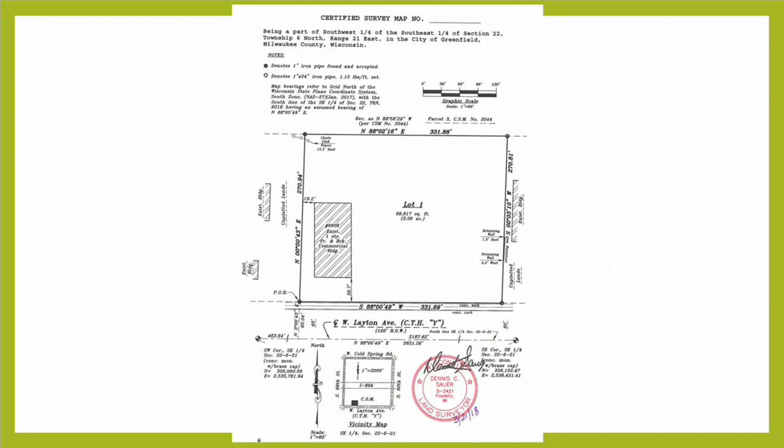Item 5 is a signage plan appeal for Jin's Sushi Seafood and Bar, the proposed business located at 7401 West Barnard Avenue, submitted by Paul Butler, Bauer Signs. There's a typo, that last zero is not supposed to be in there. Entertain a motion to approve. I'll make a motion to approve. Motion by Commissioner Carlson, second by Commissioner Kranz. All in favor? Aye. Aye. Opposed, motion carries.

Item 6 is a conceptual plan for The Lokal, a component of the 84 South development at the northwest corner of South 84th and West Layton Avenue, submitted by Scott Yauk, doing business at 84 South Restaurants, and Audrey Gill from Rinka.

Thank you, Mr. Mayor. This item was before the Plan Commission, also as a conceptual plan in August. At that time, the proposal included 3 different buildings to the very southeast corner of the 84 South development, but the northwest corner of 84th and Layton. Since then, the developer has gone back and reconsidered the options and is moving forward with a concept that includes 2 buildings. So with that, I'm going to turn the presentation over to Rinka. I'll just pull up the slides, and Rinka will provide the presentation before the Plan Commission this evening.

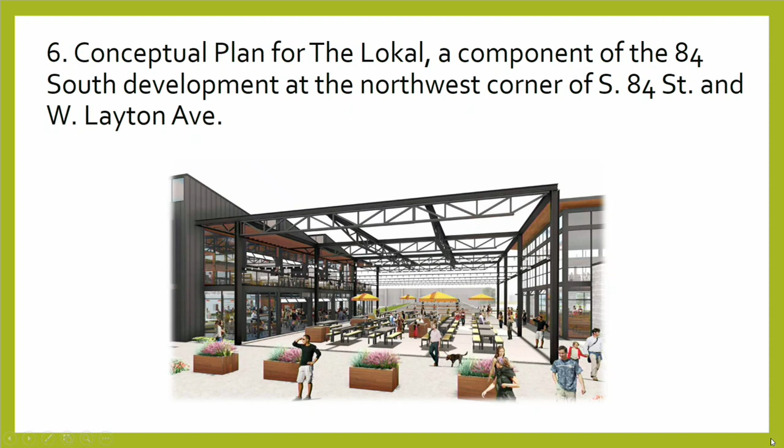Just before you start, one quick thing - this is, I think, the 4th or 5th conceptual plan. This is probably the most talked about corner in the city, and we're just trying to make sure that it's done right. So, all right.

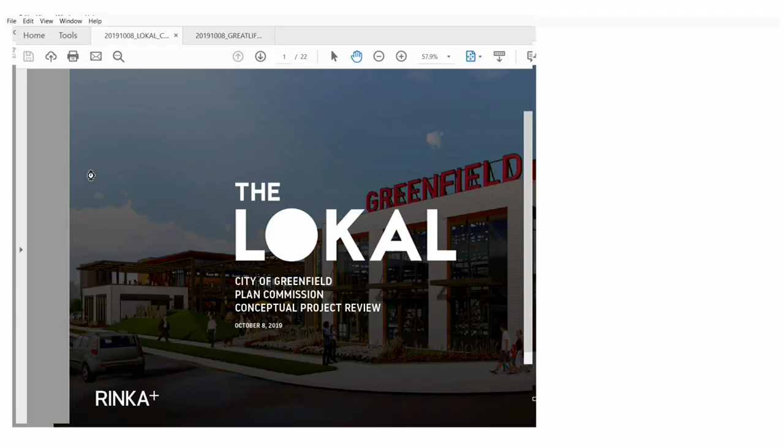Thank you for having me. I'm here in front of you to present an update as a conceptual submittal. The idea here is that we heard the feedback last time, and working with our client and developer of this project, as well as wrapping up the final pieces of this overall development - we're also the architect for 84 South - we wanted to make sure that we're continuously working with the feedback that we've received, as well as some of the council members.

The idea here is to create a very vibrant and destinational location for the city, for both residents and future visitors. We'd like to provide you with an update today, as well as an animation and some imagery that will walk you through the changes made since the last presentation.

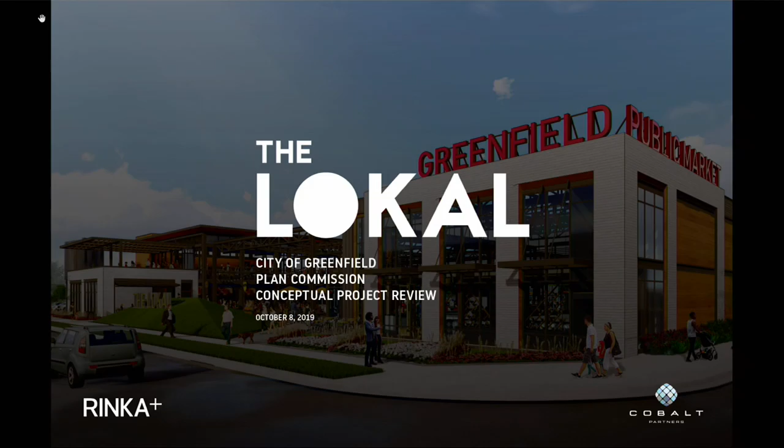Across from that is the C1 building, a public market space. It's envisioned as two levels, with space upstairs for seating and some small event space. The first floor is a very open public market with a series of 8 to 10 vendors, with great activity and seating areas for the community to gather. That building also spills open onto the Bier Garden space in the center, and both buildings work in concert around this central space.

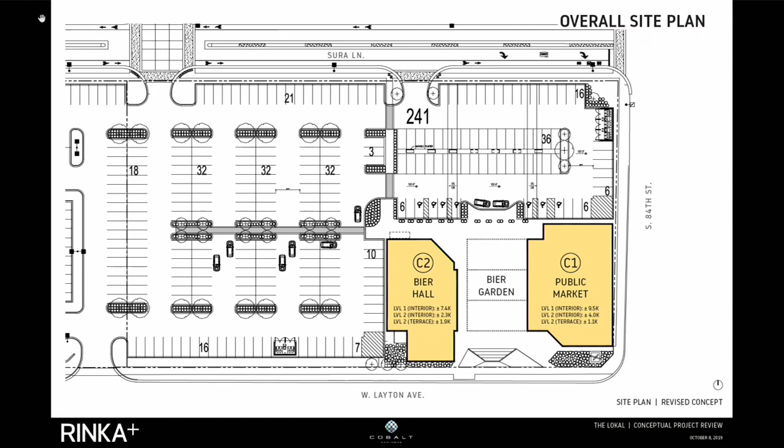In the bottom right corner of the map, there's an area of landscaping addressing the corner condition at 84th and Layton. We're also showing a small seating area, which I'll talk about more. The parking to the north and west accommodates a good ratio to make sure there's plenty of parking for patrons visiting the site.

I'll zoom in here so you can see a bit more detail. You can see the tiered seating at the south between the two buildings—an area doing dual purpose. It creates a variety of seating options for patrons, and it also creates a sound buffer and visual buffer to Layton Avenue, because when you're sitting outside enjoying dinner or a beer, you don't want it to feel like you're sitting on a highly trafficked street.

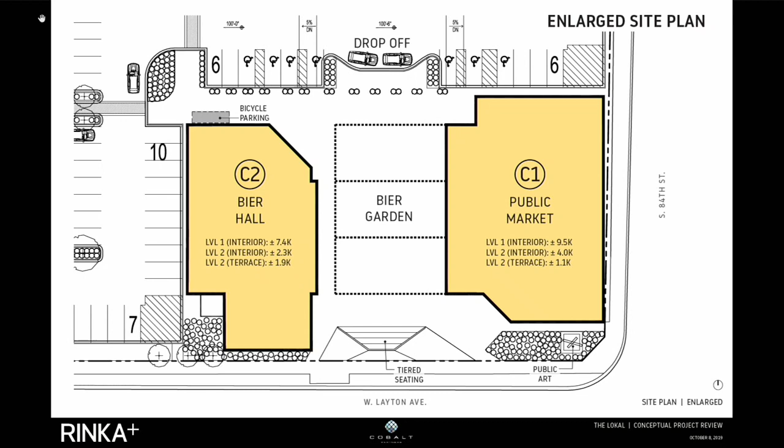So we're making some of those moves on the site, as well as ensuring a drop-off condition to get patrons safely in and out of the area. We've got bicycle parking accommodated, and trash and refuse located appropriately to separate those uses and make sure people can use the space in a great manner.

There are ways to get around this space pretty easily—seating areas and seating pockets around it, great ways to get to the parking safely, protected sidewalks, easy access, and great areas for people both on foot and on bicycles to get onto the site safely.

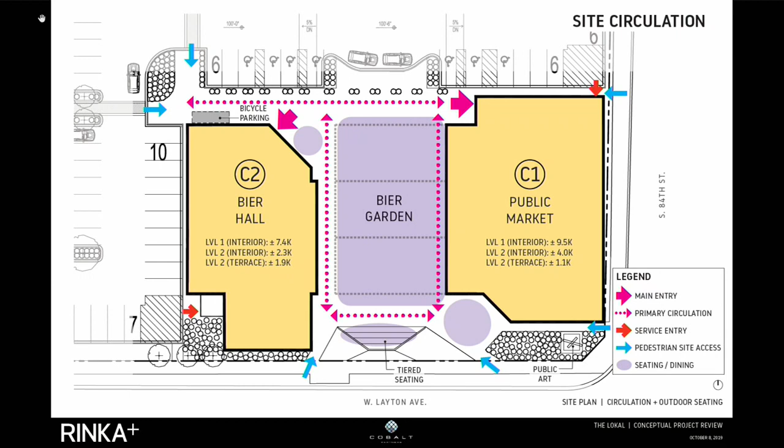And to enjoy the available amenities here. Moving forward, these aren't necessarily what we'll be doing, but as we designed this and other projects, we had to think about the flexible future nature of this site. So we looked at what we could actually fit, and the next few slides show a couple different activities that could fit within the central Bier Garden area.

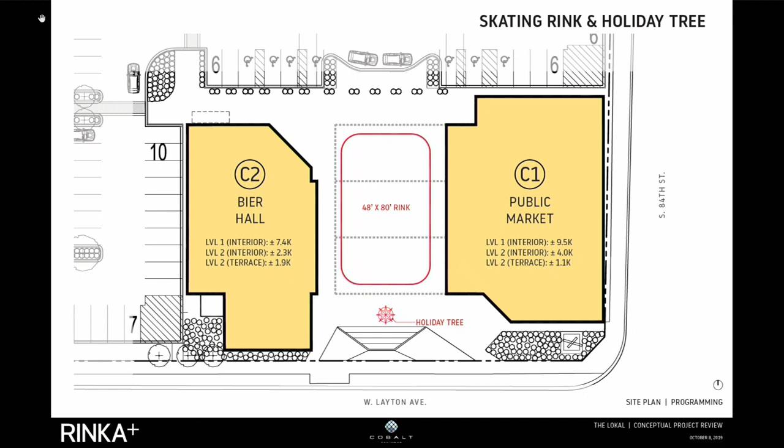We're showing a temporary ice rink that could be there for some of the winter months, as well as a space for a holiday tree, if that was something the developer, working with the city, wanted to propose. There are also 15 by 50 half sheets for curling.

This has become a popular event, a great way to get people out in those colder months when we know that's really the activation time. The space is envisioned to be used year-round as much as possible, weather permitting, but it allows us to be flexible with programming so we can have activities in colder months, bring in temporary heat, and extend the seasons a bit more, knowing our environment tends to get cold for quite a bit of the year.

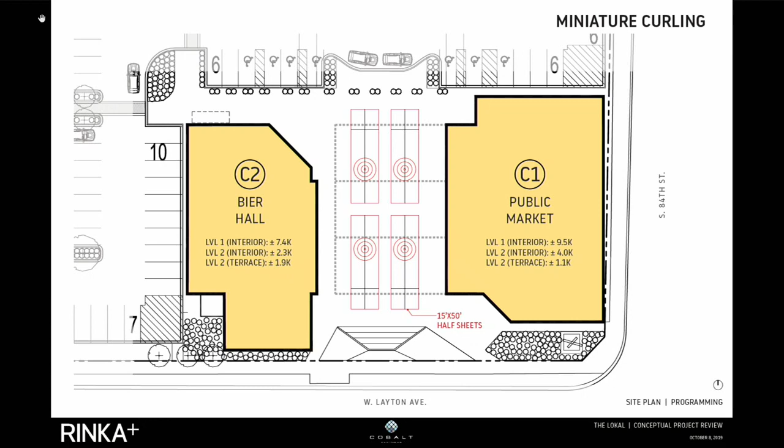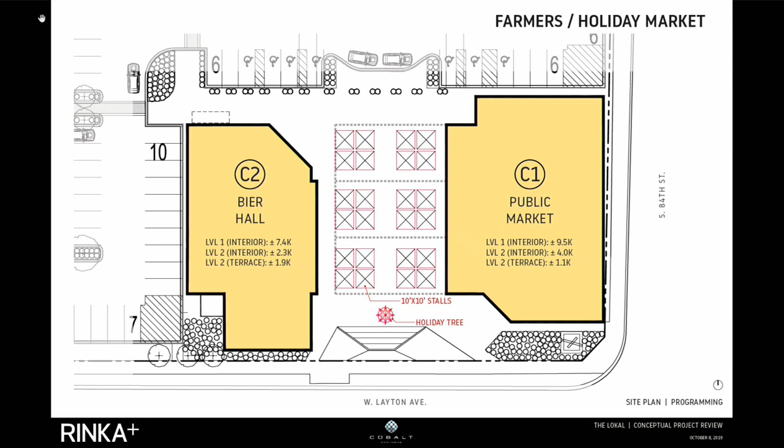There's also an area here for markets. What you see on the screen is essentially 10-foot by 10-foot stalls, whether it's a farmer's market on the weekends, a Christmas or winter market in the holiday season, or an art fair of any kind. You can see we can fit quite a few tents here in that center space.

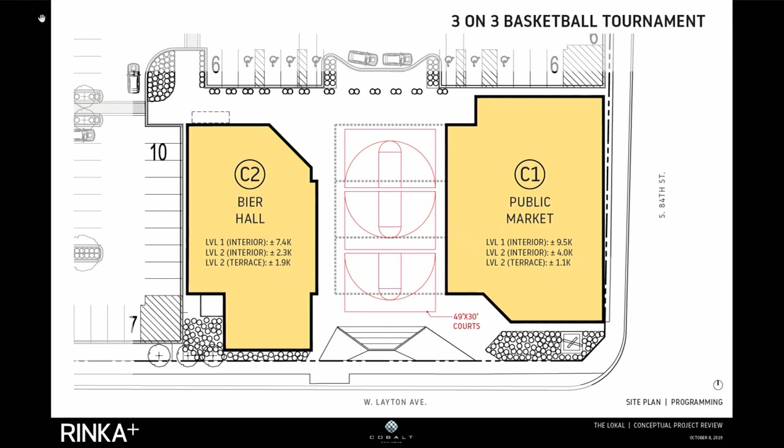Other options, as we think about sponsorships or partnerships with other area organizations, there's room here for essentially three 3-on-3 tournament courts that could be done on an early Saturday morning as part of a tournament. It gets people out to the area, moving around, and enjoying the space.

We also talked about what if there's an area here for a viewing party. Say the World Cup is going on and you want to get out for some of the games - it's a great way to get around some of your community. If we set up a screen here at the bottom end where that seating area is, you can see we can fit quite a few people in here for a viewing party for that temporary event.

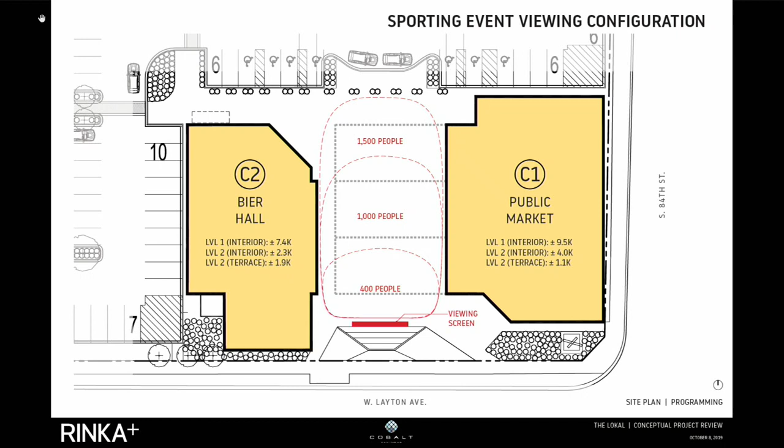Same thing with the stage - you'll see the tiered seating is actually convertible pretty easily to a stage area. If we wanted to bring in some local entertainment, do something like an Oktoberfest or a variety of other events, there's plenty of room here for people to get together and flow through the space without too much trouble. So I'll get into the floor plans here.

I'll move through these pretty quickly. The beer hall, on the left side of the screen, is a 7.4 thousand square foot first floor, essentially consisting of a large food hall in the center with a bar and full kitchen, as well as on the south end, a private dining area that can serve as overflow seating. On the right-hand side is the market aspect of this.

It's essentially a public multi-vendor space. It's got restrooms on the first floor, a small amount of them to make sure that's accommodated, space for 8 to 10 vendors, as well as potentially some vendors along the perimeter that could have a pickup window if it came to that as one of those tenants get considered.

You can see one big difference between this public market and some of the other public markets you may have been to, or even in neighboring cities - most of them don't have seating on the first floor. They become very congested and don't work well for hanging out and having a place for the community to gather. We took a very different approach here, and we want to bring seating down to that first floor to give people a great place to get together.

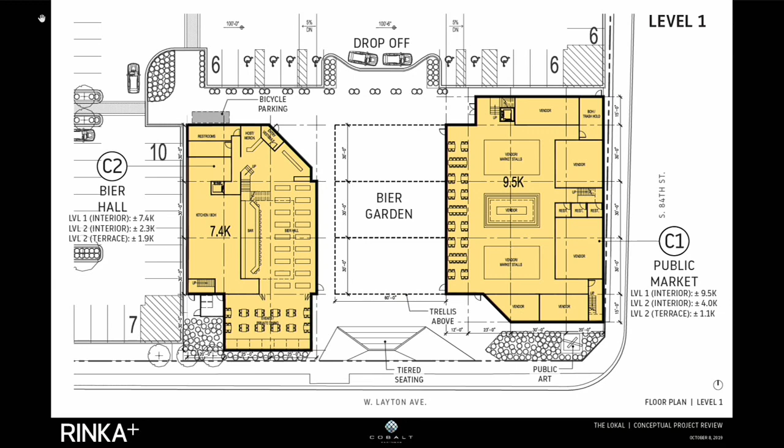When it's great weather outside, that wall facing the beer garden is operable. We can open up garage doors and make it a really great space to be at, whether you're having your morning coffee or getting together for dinner in the afternoon.

Going up to the second level, on the left-hand side of the screen is the second floor of the beer hall space. Essentially it's a large open space in the center with perimeter seating, and you'll see 2 outdoor areas, both kept fairly small, knowing there's a variety of seating options here on site.

Over on the right-hand side, the public market second floor area is treated very similarly. It's got a large open space that lets you look down onto the markets, and you can see a lot of the activity.

A big problem with public markets that have second floor seating is that it's not very desirable. It's a very dark space, usually very limited, and you're immediately away from the action. We know there's a need for seating here, especially as we look to make this a successful place.

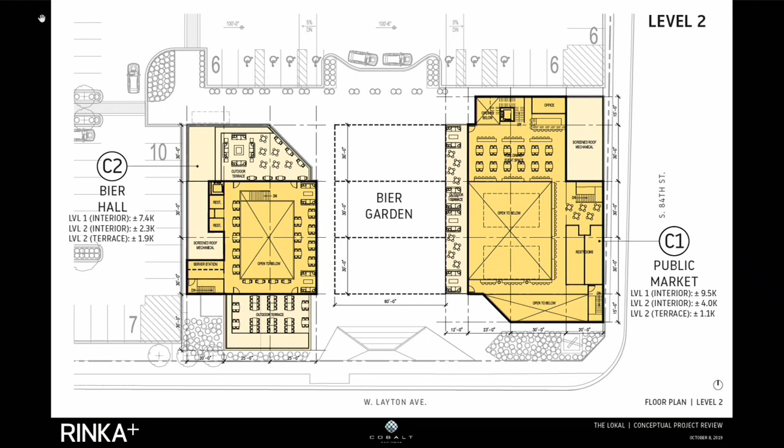It's also very convertible. You can have large gatherings up here, even a big community meeting if you wanted to. There's a room up there for a bar as part of an event. The restrooms are up there as well as some outdoor seating that looks out over that beer garden.

I'd like to play an animation for you here to give you a little bit of flavor of the architecture and the advancements we've made from the last plan. I'll give you an idea too of the scale of the space, and then I can go into some of those renderings right after that.

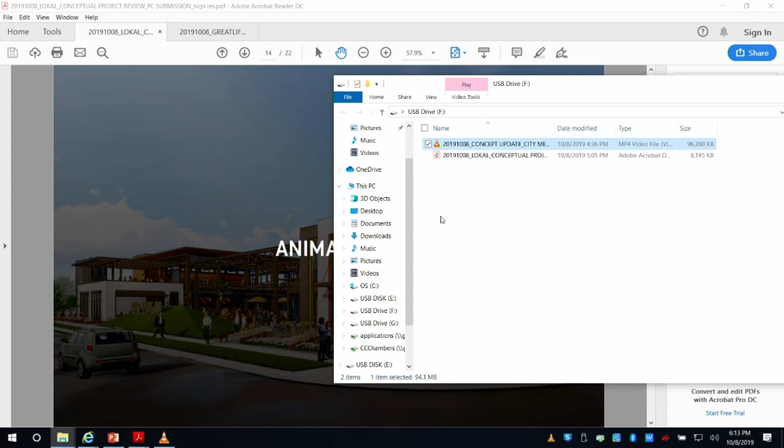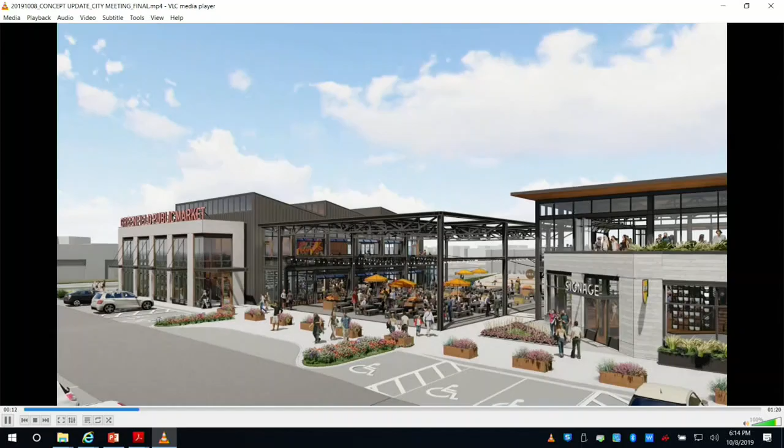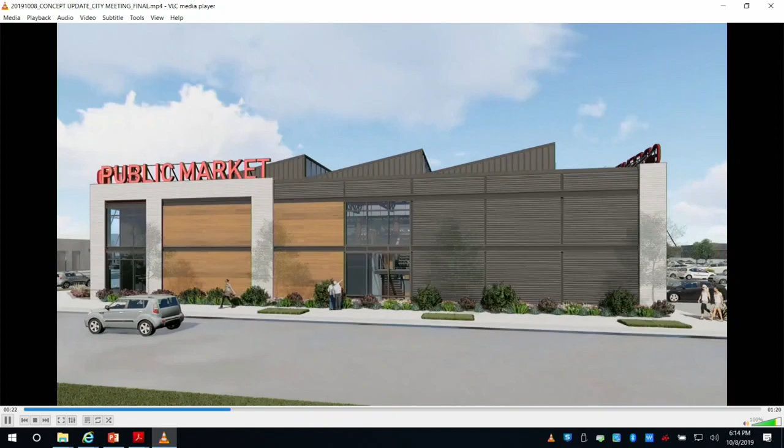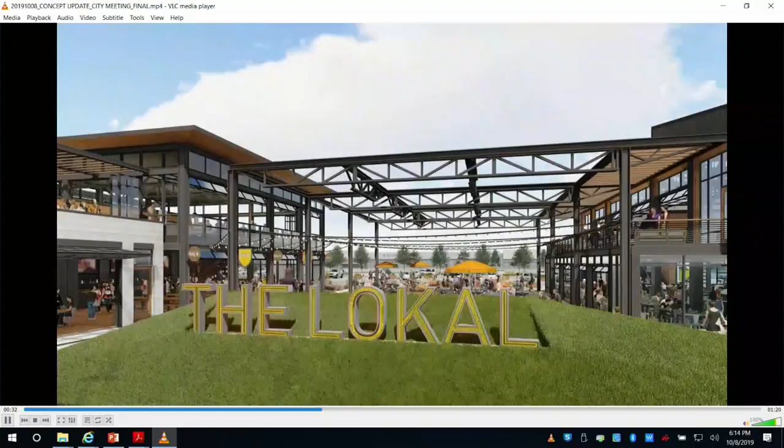So we're going to start here on the northwest corner, between the buildings there, and come around here to the east. This is now at the intersection of 84th and Layton. There's that seating area and buffer we'll talk about to limit noise and make sure there's different flexible seating options. We'll fly through the center beer garden space here. This is looking at the market side.

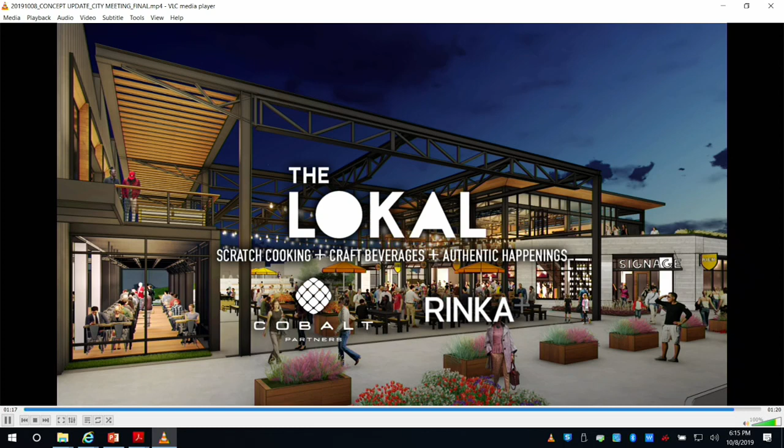As we flip back to the presentation, some of the things we've really focused on in this iteration is creating that great outdoor area for people to gather and get together. The previous iteration was 3 buildings that essentially were food and beverage buildings, and we were challenged to bring together another concept that might get a lot more variety, more reasons to come to this space, more seating options and places for the community to gather, so they can come to the market, pick up a smoothie and some flowers, and go sit outside and enjoy the weather and their community.

If you wanted to get together with a bigger group of people, you had a place to go to. It didn't feel out of place compared to going to, say, a standard restaurant where that might seem a little odd. So we wanted to address those things and make sure there were various levels of seating and opportunity to gather. Both buildings have outdoor second floor seating in different ways, whether it's very dedicated dining or an outdoor lounge space. We've got a variety of those types.

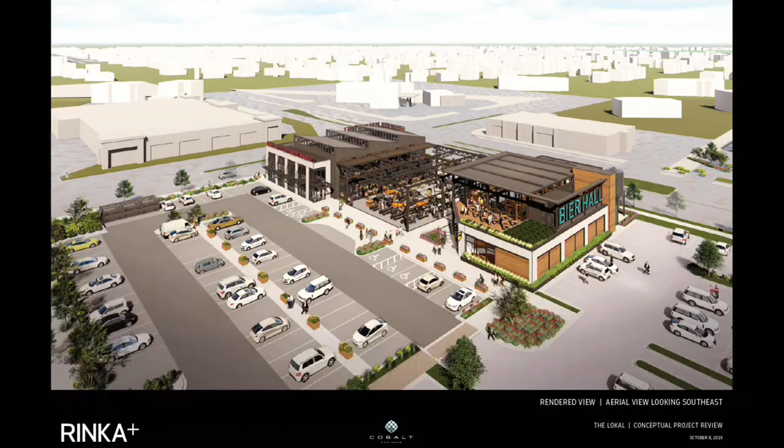I'll flip through here. This is some of the images you saw in the animation, up in the air looking back down at the site. As we move in, the central space is this taller trellis structure that would have lighting into it. Essentially, it takes that open space and brings down the scale of it. It's very similar in size, slightly shorter than what you'd experience down at the entertainment block in downtown Milwaukee.

You can see both buildings on either side flank that center space. There's a central drop-off area, and both buildings essentially have facades that open up onto that central space. This is directly north of the property, looking back towards the south. You can see the central space is kept to a very specific size. It works for all those flexible different events I was talking about, sized appropriately, but the scale is still very intimate so people feel comfortable.

It's something we do a lot in many of the projects we design, and it was very important here that the space feels active and friendly and great to be in, whether there's 10 people around you or 100 people around you.

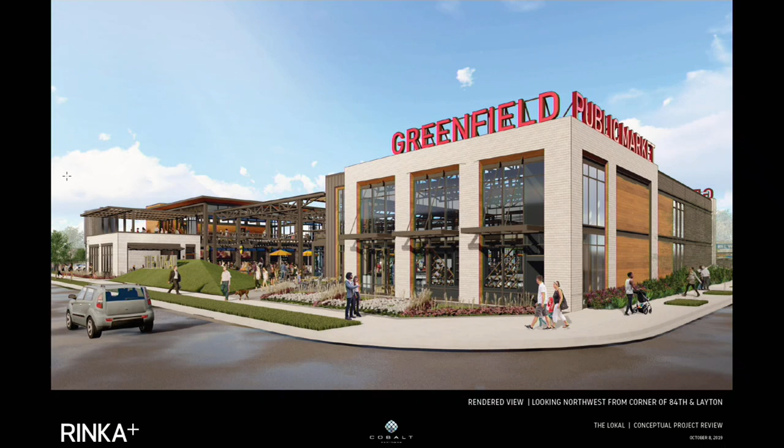This is a view from 84th and Layton, looking back. We're envisioning some great signage up on top of that building to promote the fact this is Greenfield Public Market. There's some signage on that lawn for 'The Lokal,' which is the brand of this micro development within the larger development.

You can see we've brought in a lot of windows and glazing so you can get a peek into that activity, whether you're sitting at that intersection on 84th and Layton waiting for the light to change, really piquing the interest of visitors to make sure they understand there's a great vibrant place for them to visit, hang out, and eventually come back to.

If you guys want to put them on, you're more than welcome. We'll actually put you right in the middle of the plaza. Using one of the pointers, you can go into the market, both on the first floor, second floor, and the second floor of the beer hall. We'd be happy to show that to you if you have any interest. And that concludes my presentation.

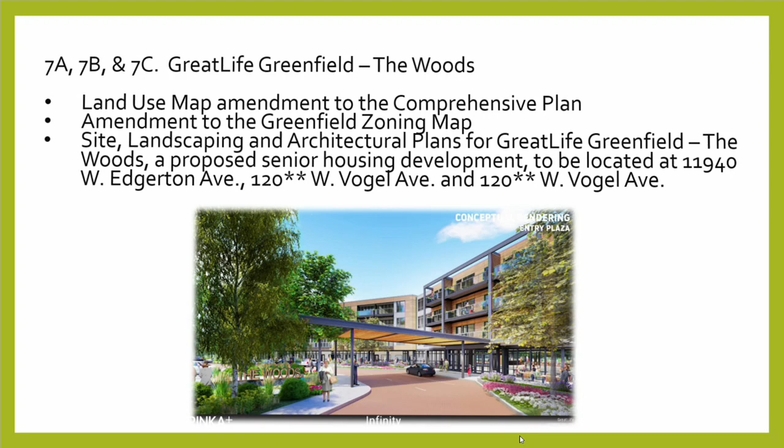You want to start? Okay. Thank you, Mr. Mayor. I'm going to do a brief overview and summary of the zoning and the requests, and then Mr. Morales will go into the design and do a presentation.

To summarize, this is a proposed 192-unit senior housing complex in one building, with a phased plan for an additional 8 townhouse units in the future to the north and 12 townhouse units to the west. Altogether this is approximately 14 acres of land, currently zoned R1 single family, and the comprehensive land use map identifies this land as single family use.

Just to get your bearings straight, this is the extreme southwest corner of the city, where you have the Village of Hales Corners to the immediate south. The municipal boundary is a little strange here - it cuts these properties, about 200 feet north of Edgerton Avenue.

So you do have the village of Hales Corners 200 feet north of Edgerton, and the blue line is the municipal boundary for the city of Greenfield. The parcels we're talking about are this larger parcel here, owned by Mr. Petrowski, and then these two individual parcels, which are split by a right-of-way.

Many years ago, the city had it laid out as a future road going east-west, parallel with Holmes Avenue. For some reason, just this one little niche of right-of-way was carved out, splitting these properties. There's a request from that property owner, Mike Zock, who owns both parcels split by the right-of-way, to vacate or discontinue that right-of-way as part of this development.

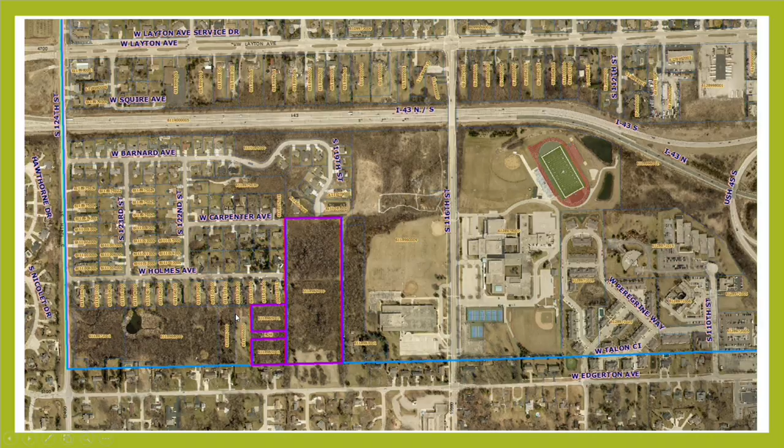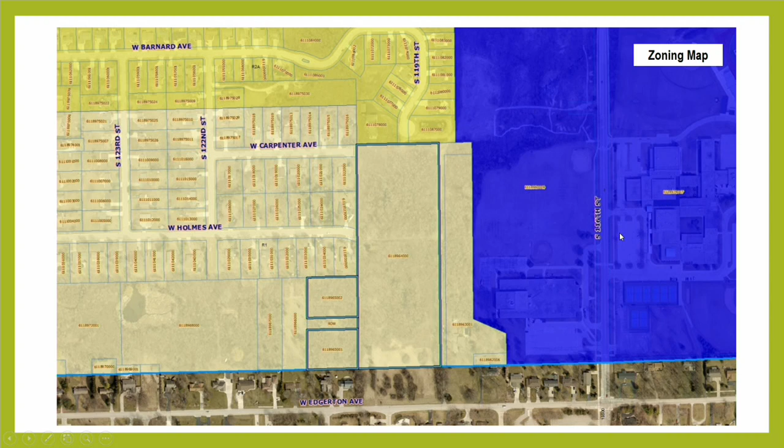So the zoning as it's laid out today identifies this area in light yellow as single family, and the area to the east is zoned institutional for the schools located there. The proposal would be to rezone this to a planned unit development for mixed residential, which would act as a buffer for the transition from institutional heavy use, since 116th is very busy during school times, to single family to the west.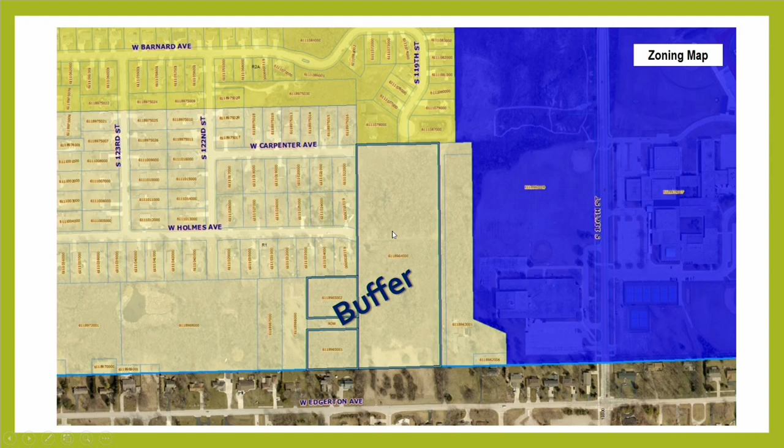The comprehensive land use map from 2008 identifies this area as single family, which could act as a buffer with the requested mixed residential comprehensive land use map amendment.

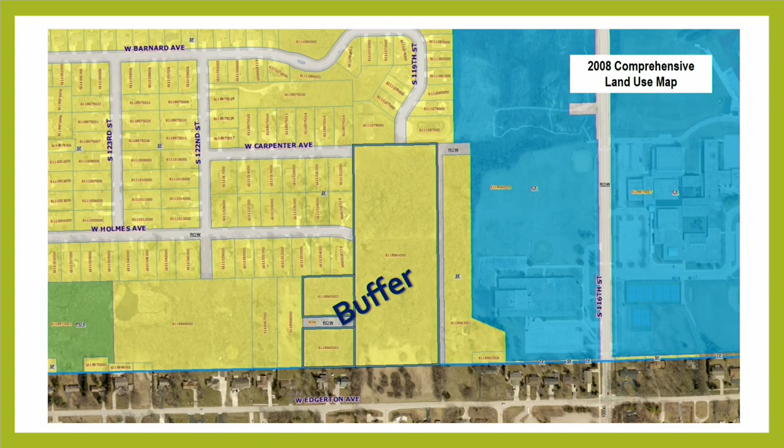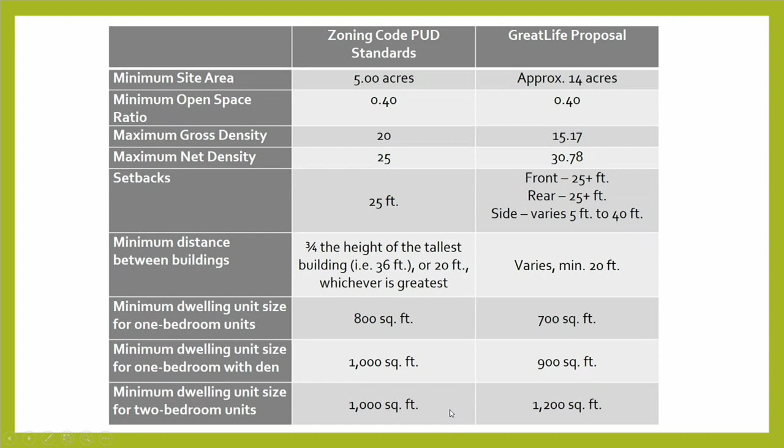Minimum dwelling unit sizes: they are proposing slightly smaller dwelling units than what the code asks for. 800 square feet for one bedroom versus 700 proposed; 1,000 square feet for one bedroom with a den versus 100 square feet less in the proposal. For two-bedroom dwelling units, they are exceeding the minimum dwelling unit size.

To summarize the amenities being offered: they will have staffing on site, including concierge, chefs, housekeepers, maintenance, and shifts, plus a fitness center, hair salon, spa, theater room, chapel, library, and shuttle services. All of this will be highlighted in the floor plans that Mr. Morales will show you.

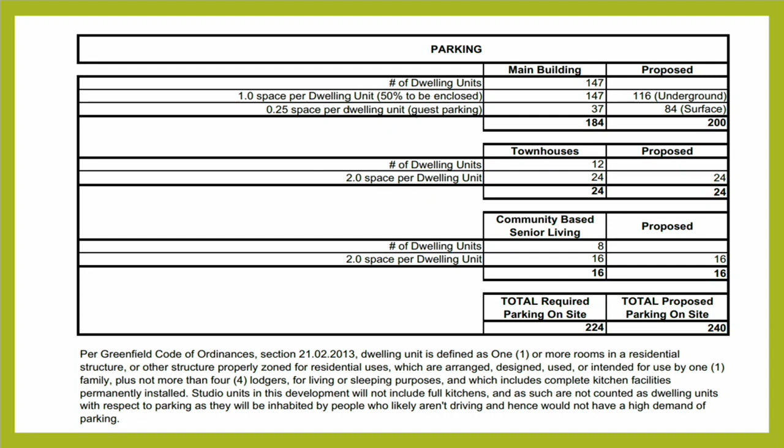As far as parking goes, the proposal exceeds the required parking total. Considering the 147-unit building plus 12 plus 8 future townhouses, they're proposing 240 parking spaces, of which 116 are underground, while the requirement is 224 — so they're exceeding by 16 spaces.

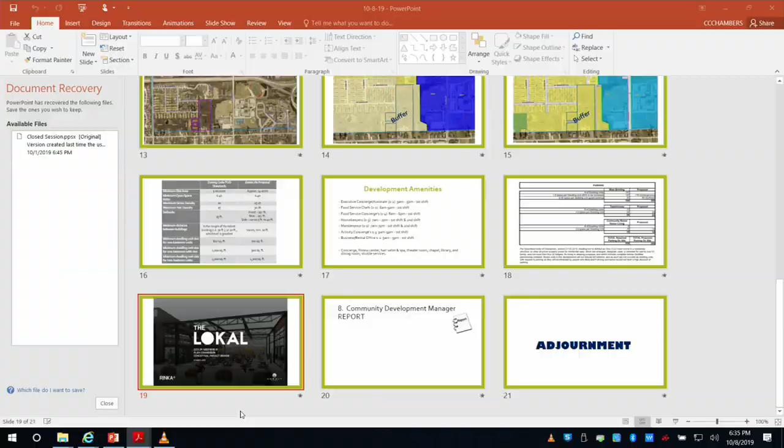And now I will turn this over to Mr. Morales. Oh yeah, good catch.

Thank you again for having me. We're very proud to present a project that we know has been a bit of a talking point for the community. One of the things we were tasked with early on was to create a development in an area with a lot of existing woodlands. We went through a very long process over a year ago, and recently engaged the forester as well to continue that conversation.

What you'll see here is an attempt to create a development that meets the densities and feasibility the developer is looking for, including addressing a lot of the sensitivities we've heard about along the way. Knowing there's a way to do development in buffer zones, or areas adjacent to other communities, we take great pride in designing projects that appropriately address that buffering, which we'll demonstrate through the presentation.

So I'll jump right in here. Some of the project goals were to preserve the major woodland areas. We've worked with the forester to do that. All of the major woodland areas are actually being worked around, screening the building as much as we can with natural landscaping, and also adding additional landscaping through civil engineering to increase some of that buffering, and also provide a very active, walkable, and safe interconnected community for the residents, as well as woodland areas we're leaving alone that could have interconnected trails serving as walking trails for residents and neighboring communities. It will be an open site for neighboring residential to walk on and use the trail system, and we'll be enhancing those as best we can, as well as a potential educational component for the nearby school to have areas within those nature areas for educational purposes.

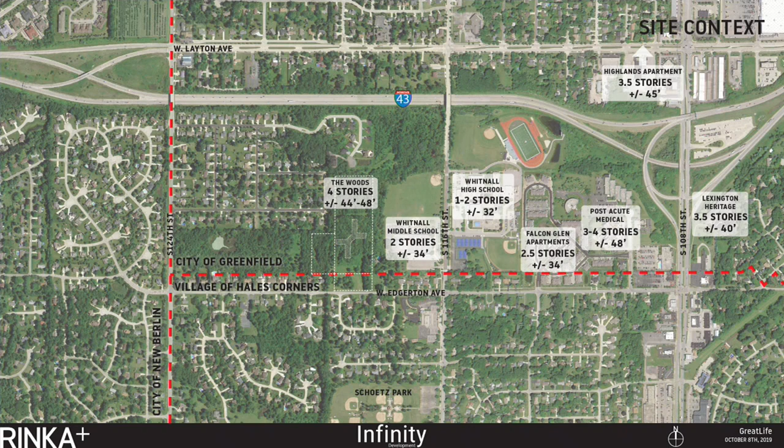Zooming in, I want to talk a little bit about some of the heights we're showing you here and walk you through it. Our building, because of the grade changes, is essentially around 44 to 48 feet. You can see some of the buildings around us, and the structures are not that far off. At various level heights, we're actually able to get more density into the building and keep the building lower because of the shorter floor-to-floor heights in a residential environment. So you can see the middle school, the high school, as well as the post-acute medical facility, which is very similarly sized at 3 to 4 stories, about 48 feet at our highest point.

Moving forward, I'll rotate your perspective here. South is to the left side of the image, so north is to your right. Just to talk about the different parcels - Parcel A, directly in the middle, is the majority of where the building is. The future parcels that Christy mentioned are some in Parcel B, and some are to the north, or to the right of that existing water main easement. You'll see that we're not seeking approval for those pads.

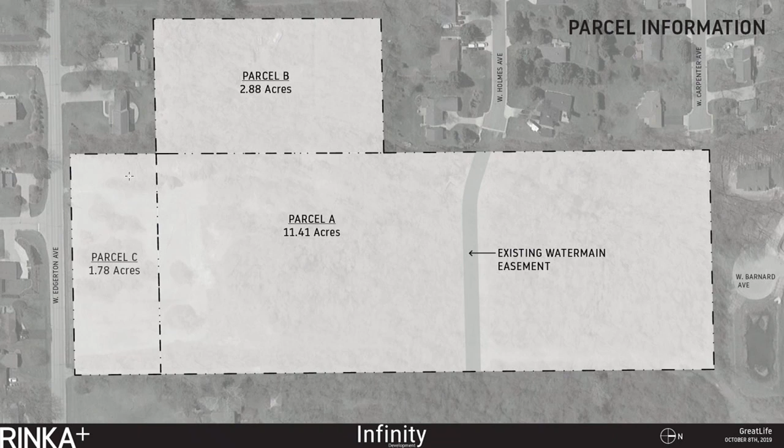They're simply an area for where future development could happen by others. You can see the existing woodland areas here. They were mapped out with some partners we have in the industry, as well as the forester. We made sure we went through and identified a lot of that with the city to make sure we're being very sensitive to it.

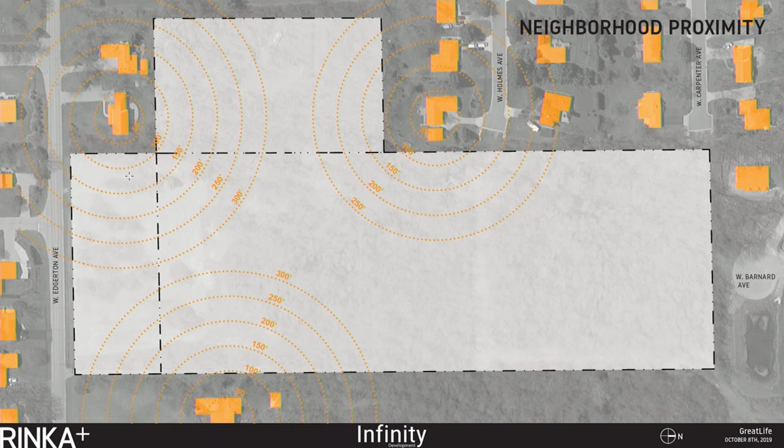What that allows us to do is take that and overlay this diagram, which shows the distance from all of the neighboring structures. You can see that 300-foot mark and 250-foot mark gets us pretty much close to the closest point on the site. I mentioned the roadway from Edgerton over to the first point on that site is well over a football field away.

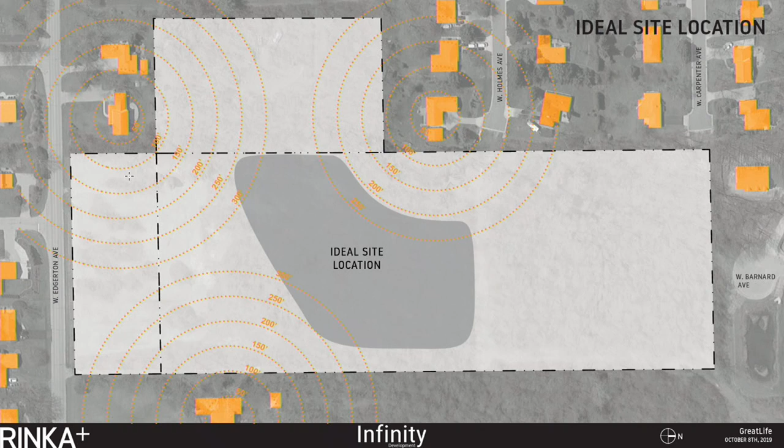So what does that leave us with when we talk about the woodland area and the distances from the structures? We're trying to capitalize on making sure we can get everything far away, make sure it's screened, and provide as much layering and buffering to the neighboring properties as we come up with an ideal site location.

We understand there are multiple steps to it. It's situating the building in a very intelligent way, making sure there's plenty of tree cover around us, both existing as well as adding in new trees through landscaping.

So when we talk about access, there's one access point off of Edgerton that gets you into the site. Then you'll see there's two connections to the two future parcels, one essentially to the west and one to the north. You'll see that dashed line on the right-hand side of the page that goes to Holmes Avenue.

That's essentially emergency access only for emergency vehicles for the fire department. We've already been in discussions with them, and we'll continue to have more discussions. There is no intent for that to be a public access point at any point. It will be coordinated with the fire department for what they would like to see.

You'll see we've done some things creatively with landscaping, which we've done in other municipalities, where we've created what looks like basically a double trail system. That's how the fire department can actually get onto the site safely. They essentially agree with that approach.

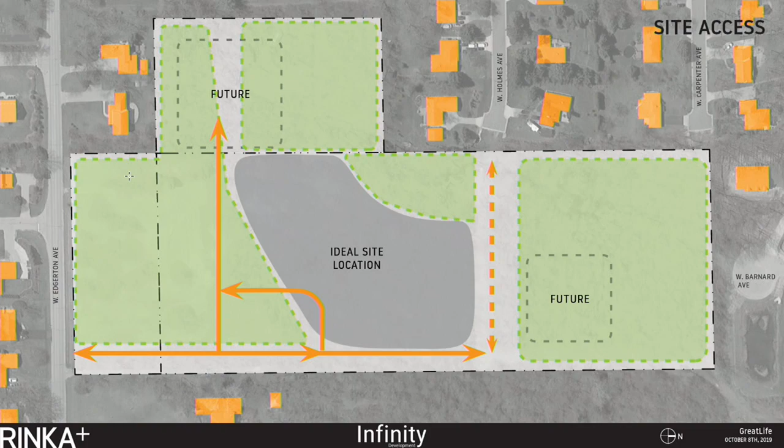We've actually done it at 84 South, and this allows the opportunity for emergency vehicles to get on without it having to look like there's a roadway all around this property, which nobody wants to look at, both from a resident perspective, and we also want to make sure people aren't encouraged to use roadways they're not supposed to be using. So this is the site situated here.

I mentioned, you see on the left-hand side of the page that blue area is essentially stormwater detention. Directly to the right of that is the first essentially leg of that building. That is what I was mentioning, a football field away from Edgerton Avenue.

As you go onto the site, going from left to right, you go up to that drop-off area down at that main entrance. There's immediate visitor parking right there. The idea here is really to create this front porch experience, which we'll show you in the renderings. The building then goes to the east in two different legs.

There is a back area that's limited. It's a smaller courtyard for outdoor activities. You'll see that in the renderings and how we're kind of addressing that.

But even in this rendering, with a lot of the trees that are in here, we actually spent a long time trying to make sure we're covering all of the existing trees in this area. So a lot of this is all there, plus the additional landscape we're providing.

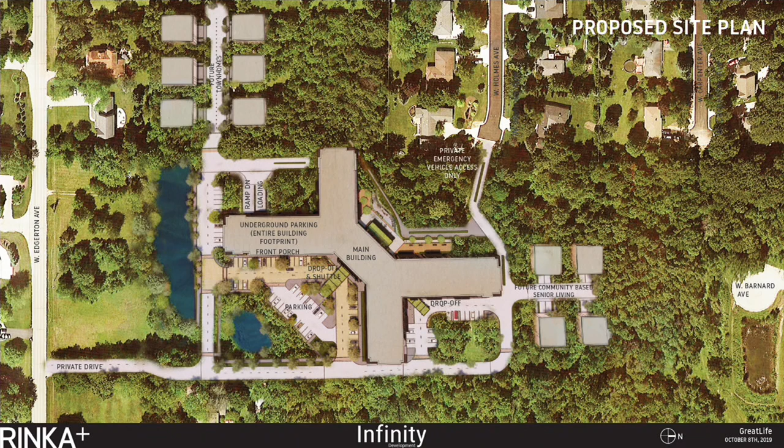You see there's quite a bit of buffer from this building to the various directions, even to that closest resident that's in the top right corner of the development.

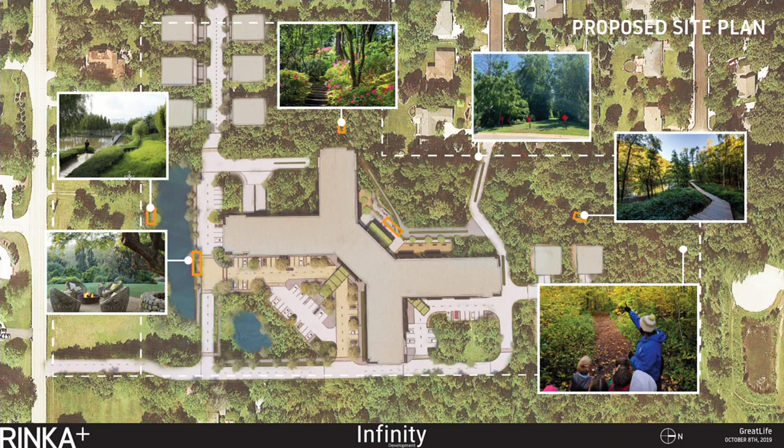So what do we mean when we talk about enhancing some of those amenities for the community? Along the stormwater pond, as well as through some of the trails around the development, GreatLife is committed to enhancing some of those trail systems to make sure it becomes a great community asset, something the surrounding community can use, as well as potentially creating an educational component for the school system.

Talking a little bit about canopy covers and the heights of things.

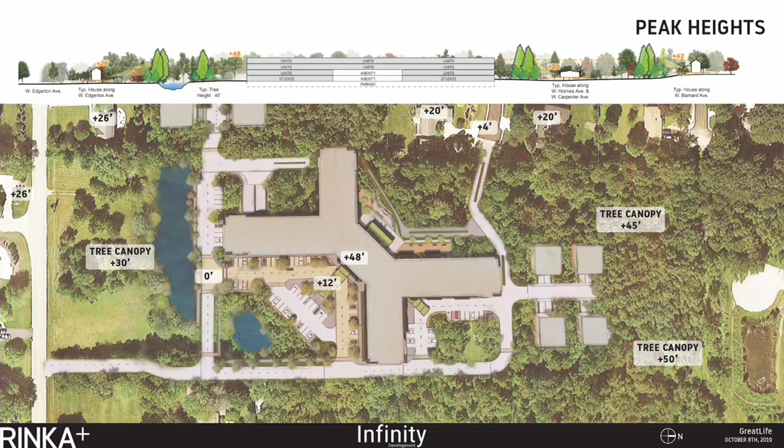I'd like to play an animation very similar to the last presentation. This will give you an idea of how the building is situated, what the aesthetic is as you get closer, and some of the things we've done from various perspectives to layer in, buffer, and create opportunities. You'll also see the materials on the building—very natural colored materials so they can blend into that tree environment, with natural, warm tones.

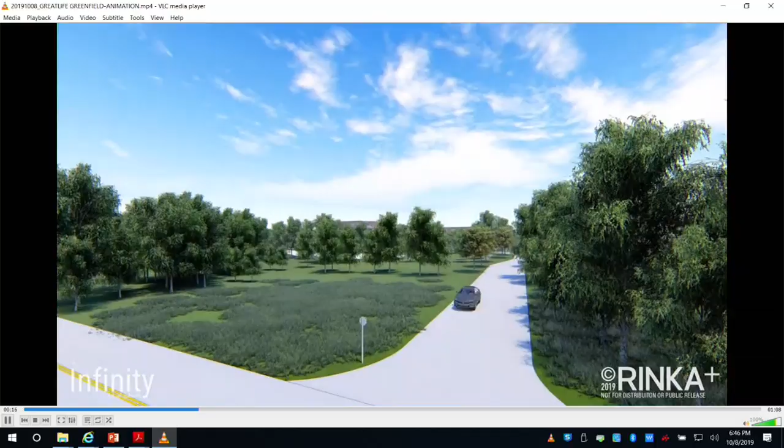Distance back to the building. This is that private drive, now driving up to the front door. Along the right-hand side, it's very much a front porch experience for residents to come out, wait for their rides if they're going to get one, or have places to congregate out in front of the building.

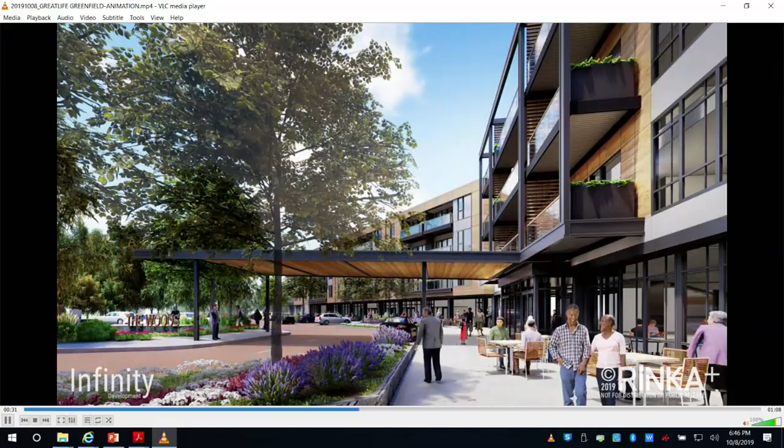Moving along here along the front of the building, there are some amenity spaces. The idea here is to make sure we're activating that ground floor—making sure residents have a safe space, a great place to interact and have some social interaction.

This is the back side of the building where that outdoor courtyard area is. It's very limited, a very narrow space, but we want to make sure there were some great outdoor opportunities. To the right, there's a lot of buffering and tree cover that's going to shield this and create a very safe, pleasant environment to hang out in the afternoon.

So as we go back to the presentation, I'll run through a few of the renderings I mentioned and talk a little bit about the materials and how we address some of these items.

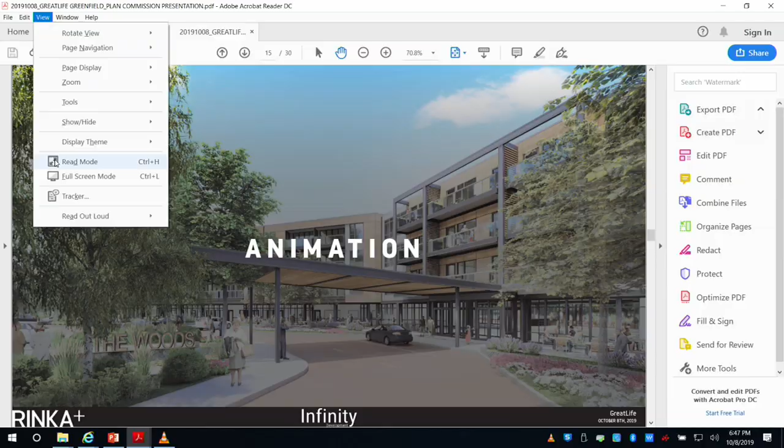This is that drop-off condition. There's enough room for emergency vehicles to get underneath the cover. The materials are very warm in nature—we're using a lot of wood materials or wood-look materials, high-quality materials. It's a low-maintenance building, and the materials are actually on the table here in front of us.

There's some stone being used, some phenolic wood panels, as well as some metal trim work. That gives depth to the building. We're also using some darker materials to make sure it blends in a little bit more into the landscape.

Around this is that front porch condition I mentioned. There are balconies on the upper floors for some residents, coupled with more greenscape elements that bring greenery up near those doors. That front door area to the right-hand side is essentially some of those amenity spaces at the first level.

Again, landscaping, lots of layering. You can see we're planting trees, a lot of lush landscaping, even in the front for that drop-off where the parking area is. We're being very conscious of that and trying to layer a lot of it in.

This is essentially where we were just looking at—on the left-hand side is still the front of the building. There are some social spaces out there with, again, layered landscaping at that front parking area.

This is the back side of the building. You see there's a small outdoor area here for congregation of the residents. What you see directly in the center of that shot is essentially a story-and-a-half height space—that's the cafe or dining area for the residents.

So they've got indoor access. Those are some garage doors we can open up. They're going to get great environments again for those warmer months when we actually get to enjoy it here in Wisconsin. It'll be a great opportunity to get outside and actually have your meals right outside the cafe.

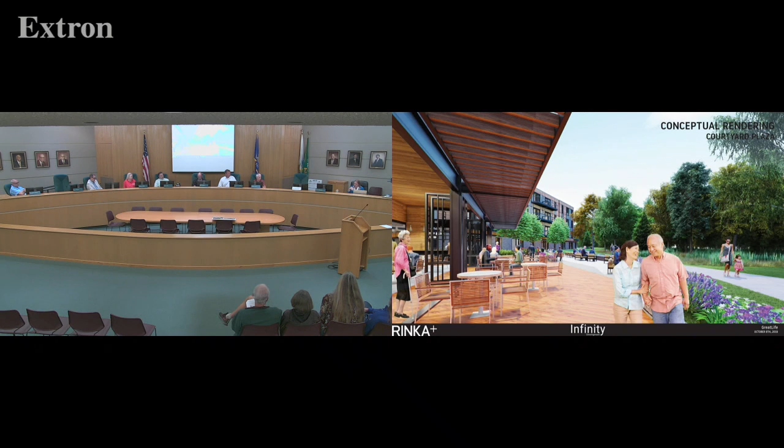There is only one more step for the approval process. The request is to rezone the land and to amend the comprehensive land use plan and the site landscaping architectural design. That process — the state statutes determine the process with a comprehensive land use map amendment. There is a 30-day public comment period that's required.

Hence, the next meeting is December 17th, and that is when the Common Council could vote that evening on the rezone, comprehensive land use map amendments, and the site landscaping plans.

And after... I don't know why it's awful. You have a speaker above your head which screws it up too.

Is that it? Okay — if the Common Council were to approve the project that evening, the developer at that point could simply move forward with submitting plans to the state and submitting plans to the city for permitting. It's a lengthy process. Also, one thing I wanted to mention is the developer is requesting a 2-year approval.

There is a potential project in Mukwonago. He's not quite sure which one would take place first, and he's not interested in doing both at the same time. Hence the request for a 2-year approval, which would mean that if the Common Council were to approve it in December, he would have 2 years.

Does that make sense? Okay. The other final thing I want to say is our ordinance requires that people located within 400 feet get notified. That's in Greenfield, for the Greenfield residents. On the Hales Corners side, we send the notices to their village clerk, and sometimes the developers will also get the mailing lists of people on that side.